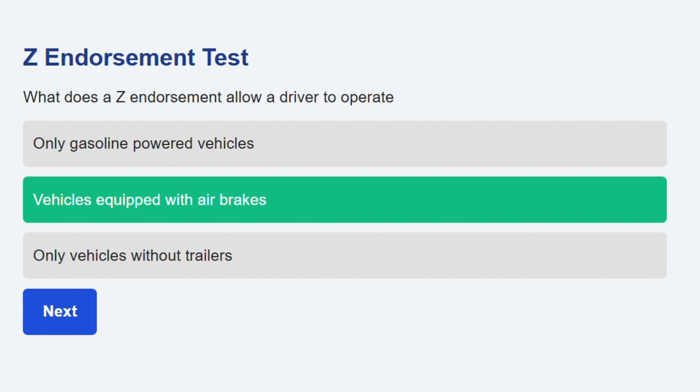Moving on, the air compressor governor should cut out at approximately 120 to 135 psi. This is the standard range where the governor stops the compressor from building more pressure, preventing overpressurization of the system while maintaining adequate reserves for safe operation.

Next question. The air compressor governor should cut in at approximately 100 psi. At this pressure point, the governor signals the compressor to start building air again, ensuring the system maintains sufficient pressure for proper brake operation.

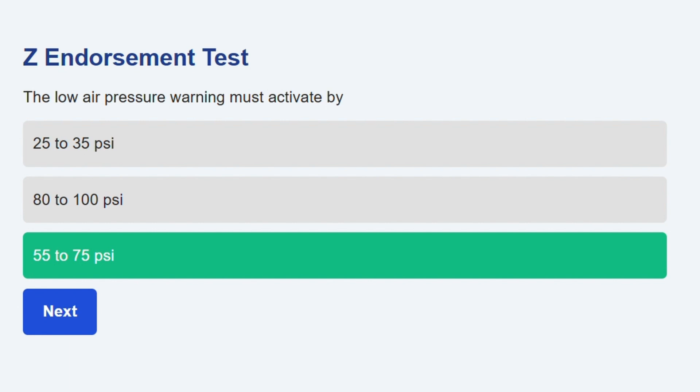The low air pressure warning must activate by 55 to 75 psi. This warning gives drivers critical notice that air pressure is dangerously low, allowing time to safely stop before the spring brakes automatically apply.

Spring brakes will begin to apply automatically when system pressure falls to about 20 to 45 psi. This automatic application serves as a final safety measure, bringing the vehicle to a stop when air pressure becomes too low for safe operation. Next up, the safety relief valve is typically set to open at approximately 150 psi.

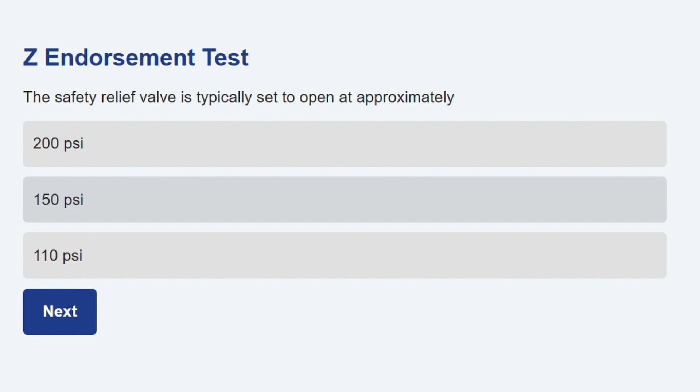This valve protects the air brake system from damage by releasing excess pressure if the governor fails to cut out the compressor at the proper pressure.

Let's see what's next. The primary function of an air dryer in an air brake system is to remove moisture and oil from compressed air. This is crucial because moisture can freeze in cold weather and block air lines, while oil can damage rubber components in the brake system.

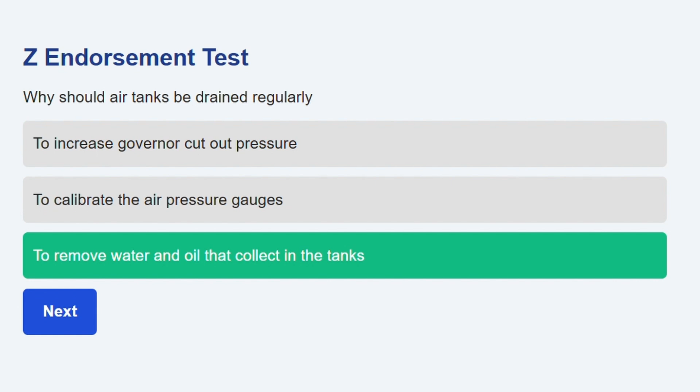Why should air tanks be drained regularly? To remove water and oil that collect in the tanks. Regular draining prevents these contaminants from building up and potentially causing brake failure or freezing in the air lines during cold weather. Dual air brake systems are designed to provide separate primary and secondary circuits for redundancy.

This design ensures that if one circuit fails, the other can still provide enough braking power to safely stop the vehicle. Moving on, compared to hydraulic brakes, the normal brake lag for air brakes is about 0.4 seconds.

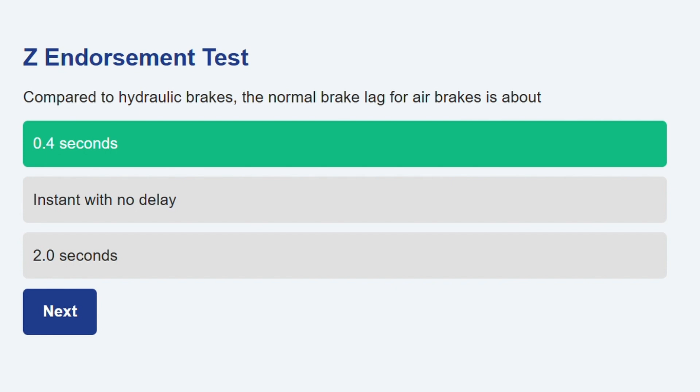This delay occurs because compressed air takes time to travel through the lines and activate the brakes, which drivers must account for when stopping.

The S-cam brake mechanism converts pushrod motion into cam rotation to spread brake shoes. This mechanical advantage system efficiently transforms the linear force from the brake chamber into the rotational force needed to press brake shoes against the drum.

With brakes released, slack adjuster free play of more than about how much indicates adjustment is needed? About 1 inch at the pushrod. Excessive free play means the brakes are out of adjustment and won't apply properly, reducing braking effectiveness and increasing stopping distances.

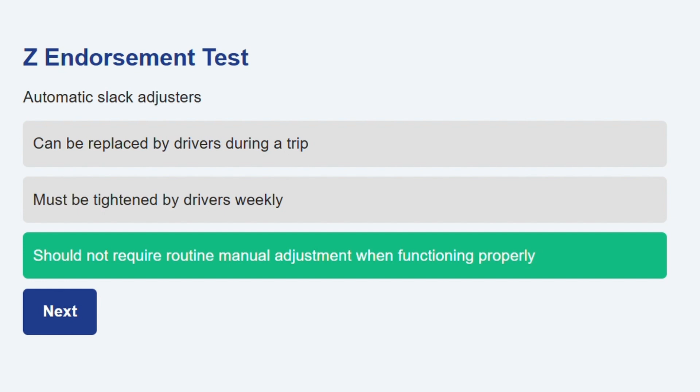Automatic slack adjusters should not require routine manual adjustment when functioning properly. These devices are designed to maintain proper brake adjustment automatically, though they still need regular inspection to ensure they're working correctly.

From 85 to 100 psi, air pressure should build within 45 seconds or less. This standard ensures the compressor is working efficiently and can quickly restore operating pressure for safe vehicle operation.

With the engine off and service brakes applied, the maximum air loss for a single vehicle is 3 psi per minute. This test checks for leaks in the service brake system, with anything exceeding this rate indicating a dangerous air leak that needs immediate repair.

With the engine off and brakes released, the maximum air loss for a single vehicle is 2 psi per minute. This static leak test helps identify problems in the air system when the brakes aren't applied, ensuring the system can maintain pressure during normal operation.

At startup, the ABS indicator light should come on briefly and then turn off after self-check. This bulb check and system test confirms the ABS is functioning properly and ready to assist with vehicle control during hard braking.

Parking brakes on air brake vehicles are held by mechanical spring force. This fail-safe design ensures the parking brakes will automatically apply if air pressure is lost, preventing runaway vehicles.

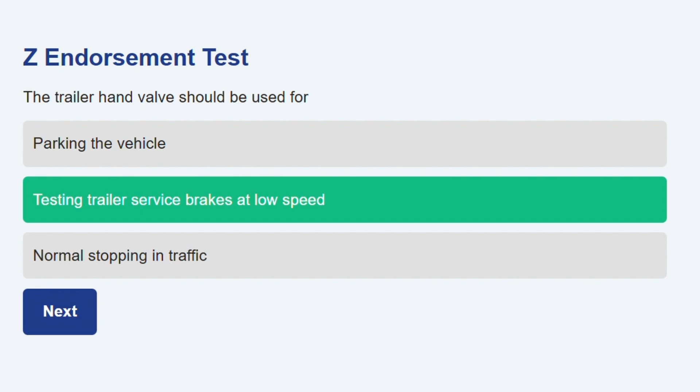The trailer hand valve should be used for testing trailer service brakes at low speed. Using it for normal stopping is dangerous because it only applies trailer brakes, which can cause jackknifing or loss of control.

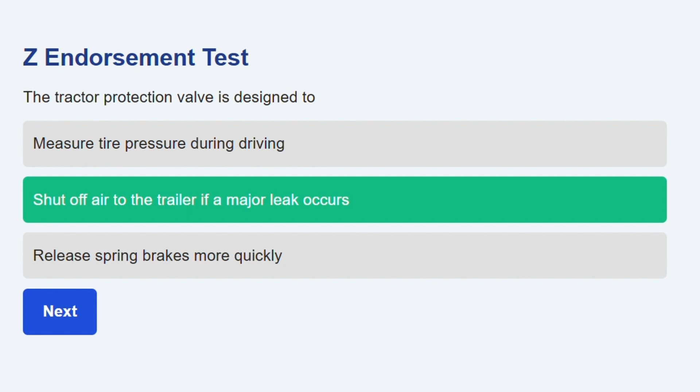The tractor protection valve is designed to shut off air to the trailer if a major leak occurs. This valve preserves air in the tractor's system, ensuring the driver maintains enough pressure to stop safely even if the trailer air system fails.

On most tractors, the emergency supply line is red and supplies trailer air. This color coding helps ensure proper connection, as the red line controls both the trailer's air supply and emergency brake release.

Glad hand seals should be replaced if cracked or leaking. Damaged seals allow air to escape, reducing system efficiency and potentially causing brake failure if the leak becomes severe.

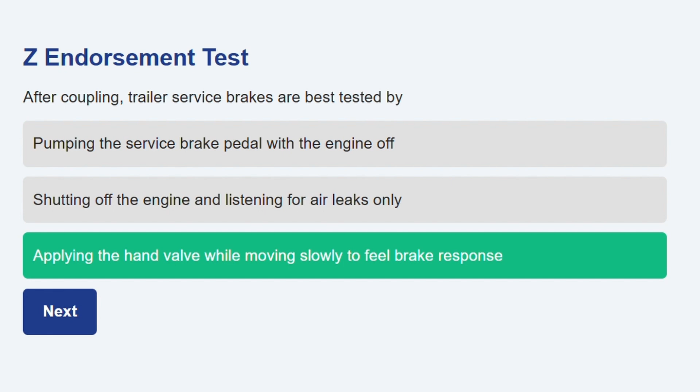After coupling, trailer service brakes are best tested by applying the hand valve while moving slowly to feel brake response. This low-speed test confirms the trailer brakes are connected and functioning before entering traffic. Here's another one.

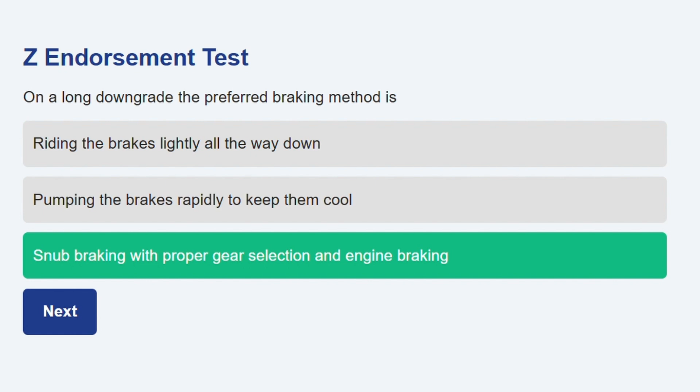On a long downgrade, the preferred braking method is snub braking with proper gear selection and engine braking. This technique involves firm brake applications to reduce speed, then releasing to let brakes cool, preventing brake fade from overheating. Brake fade can be reduced by controlling speed with a lower gear and engine brake. Using the engine to help control speed reduces the work required from the service brakes, keeping them cooler and more effective.

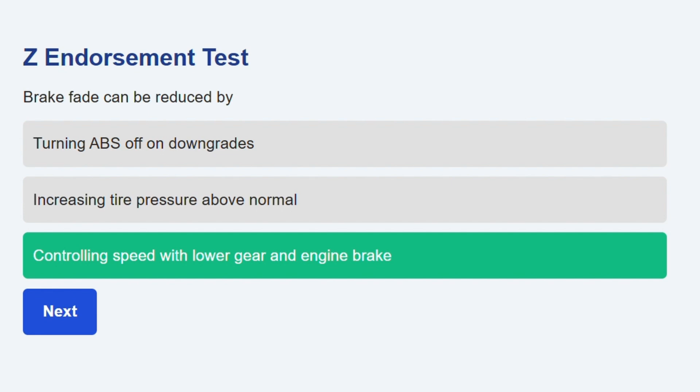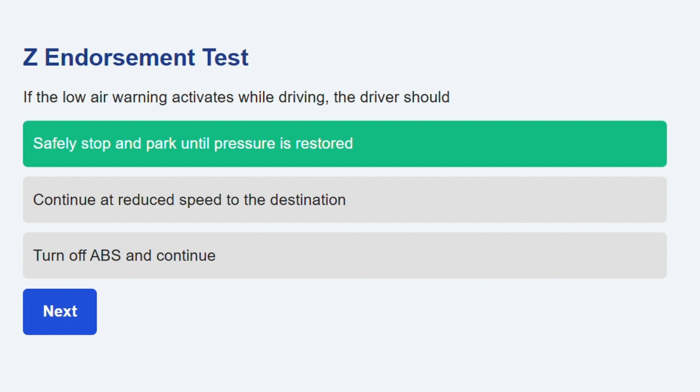If the low air warning activates while driving, the driver should safely stop and park until pressure is restored. Continuing to drive with low air pressure is extremely dangerous as the spring brakes could apply suddenly, causing loss of control.

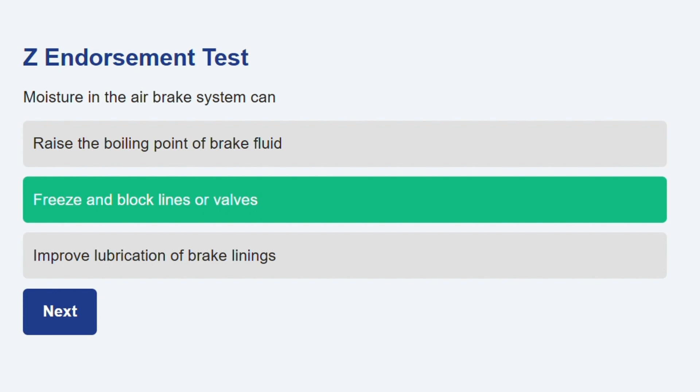Moisture in the air brake system can freeze and block lines or valves. Ice blockages prevent air from reaching the brakes, potentially causing complete brake failure in cold weather conditions.

When inspecting brake drums, you should look for cracks, grooves, or bluing from heat. These signs indicate potential brake failure risks, with cracks possibly leading to drum breakage and heat damage reducing braking effectiveness.

Disc brakes operate by calipers clamping a rotor to create friction. This design provides more consistent braking than drum brakes and better heat dissipation, though they're less common on heavy commercial vehicles.

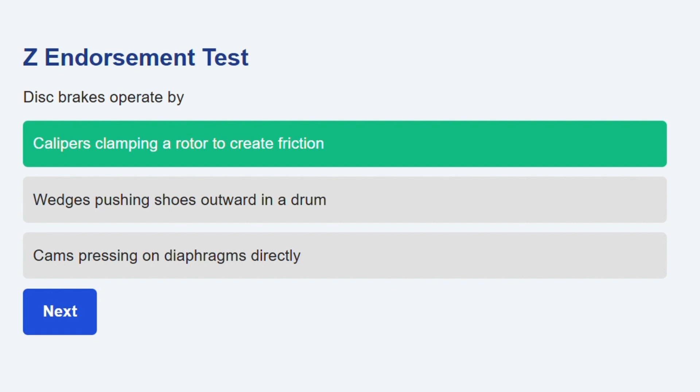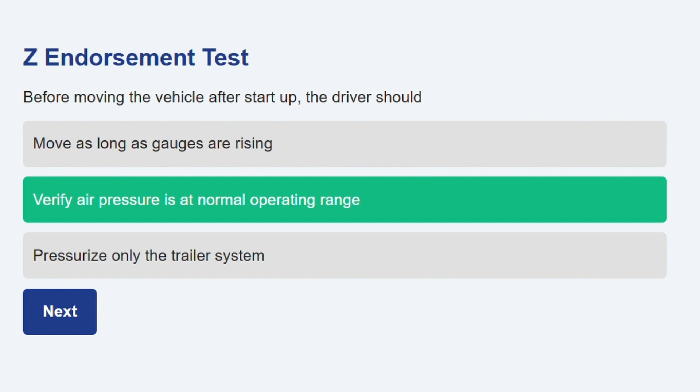Before moving the vehicle after startup, the driver should verify air pressure is at normal operating range. Starting to drive without sufficient air pressure means the brakes may not function properly, creating an immediate safety hazard.

If one circuit in a dual air system loses pressure, the driver should stop and have the system repaired before driving. Even though one circuit remains, continuing to drive is unsafe and illegal, as the vehicle no longer has the required redundancy for safe operation.

Pushrod stroke must be within manufacturer limits when brakes are applied. Excessive stroke means brakes are out of adjustment, reducing braking force and increasing stopping distance dangerously.

Adjustments to air brakes should be made only by trained and authorized personnel. Improper adjustment can cause brake failure or uneven braking, making this a task that requires proper training and certification.

When parking on a grade with an air brake vehicle, set the parking brakes and use wheel chocks as needed. This combination provides redundant protection against vehicle movement, especially important with heavy commercial vehicles.

To check basic compressor operation, you should observe that pressure builds to cutout range. This confirms the compressor can build adequate pressure and the governor properly controls the cutout function.

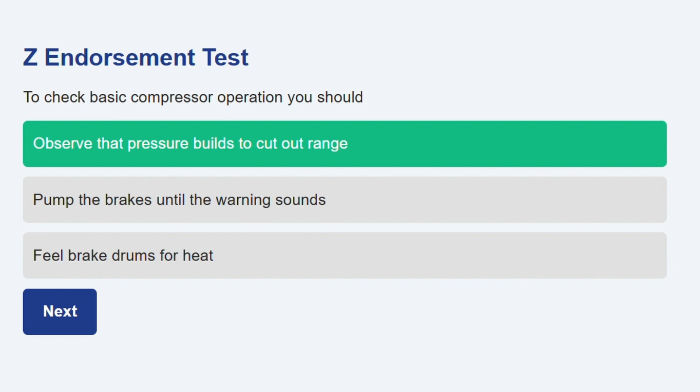The component that controls compressor loading and unloading is the governor. This device monitors system pressure and automatically controls when the compressor pumps air or runs unloaded to maintain proper system pressure.

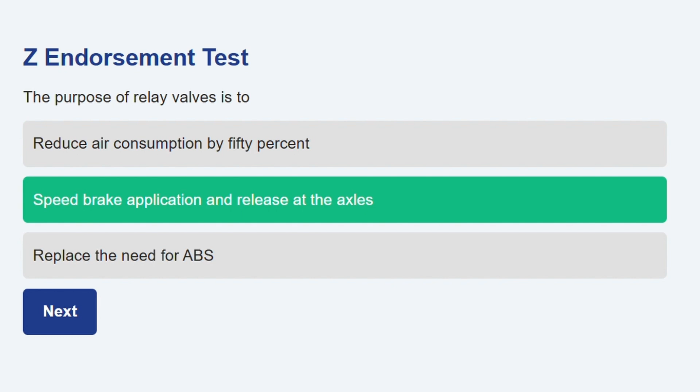The purpose of relay valves is to speed brake application and release at the axles. By positioning these valves closer to the brake chambers, they reduce the distance air must travel, improving brake response time.

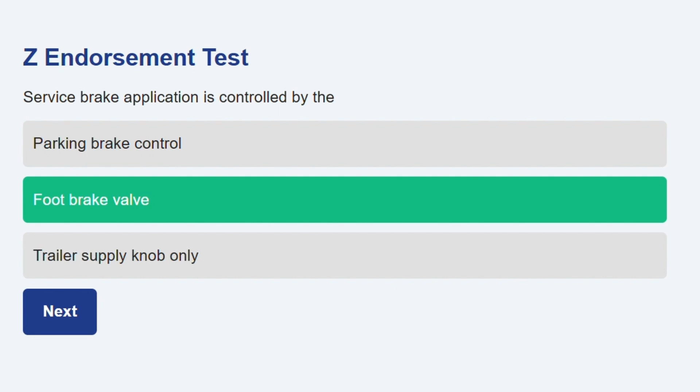Service brake application is controlled by the foot brake valve. This valve meters air pressure to all service brakes proportionally to pedal pressure, allowing smooth and controlled stopping.

A proper tug test after coupling involves gently pulling against applied trailer brakes. This test confirms the fifth wheel is properly locked and the trailer won't separate when moving forward.

Trailer emergency brakes will apply automatically if supply line pressure is lost or drops too low. This fail-safe feature ensures the trailer will stop if it becomes disconnected or loses air supply from the tractor.

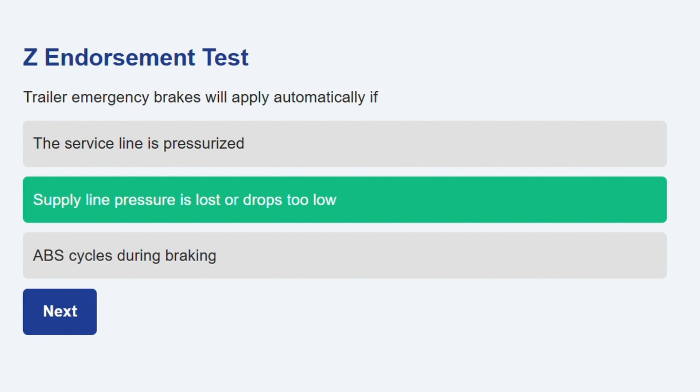Shutting the engine off on a downgrade is unsafe because engine braking and power steering are lost. Without the engine running, you lose these critical control systems while the air pressure gradually depletes, creating multiple safety hazards.

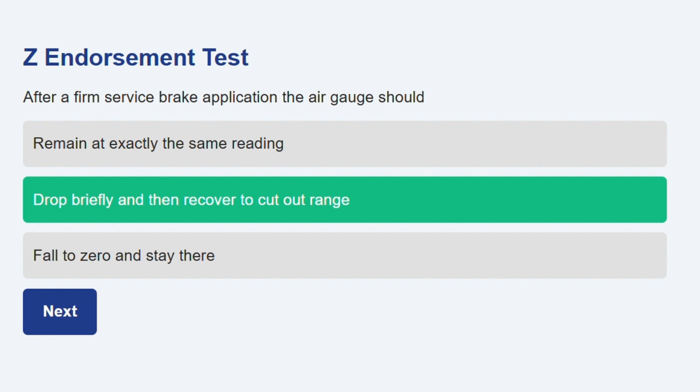After a firm service brake application, the air gauge should drop briefly and then recover to cutout range. This pattern shows the system is using air for braking, but the compressor is maintaining adequate pressure for continued safe operation.

If the ABS warning light stays on after startup, you should brake normally and schedule service soon. While ABS malfunction doesn't affect normal braking, it means you won't have anti-lock assistance during emergency stops.

The trolley valve is intended primarily for testing trailer brakes. Also called the hand valve or Johnson bar, this control allows independent trailer brake application for testing and limited parking situations.

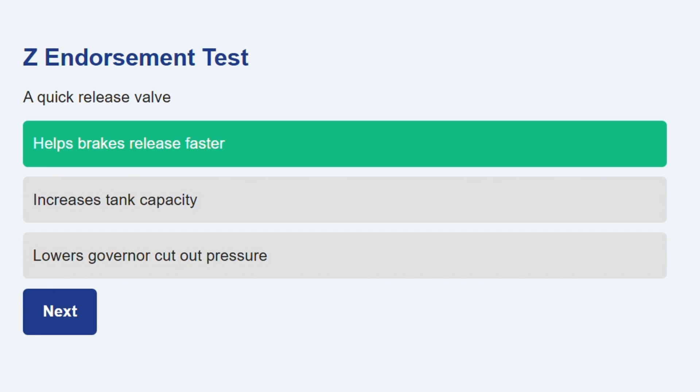A quick release valve helps brakes release faster. By exhausting air directly at the brake chambers rather than back through the entire system, these valves reduce brake release time and improve vehicle control.

In freezing conditions, an alcohol evaporator or air dryer helps by preventing ice in lines and valves. These devices either remove moisture before it enters the system or add alcohol to lower the freezing point of any remaining water.

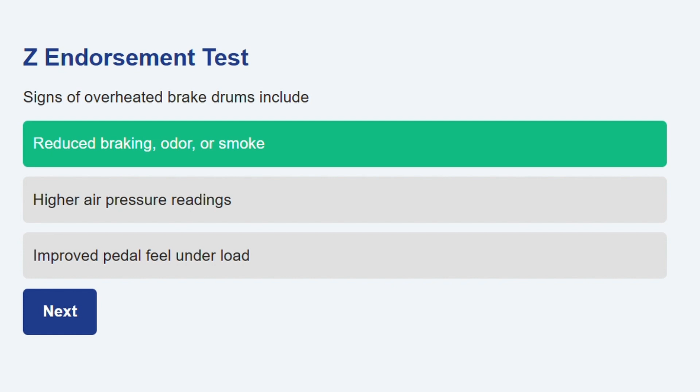Signs of overheated brake drums include reduced braking, odor, or smoke. These warning signs indicate dangerous brake fade, requiring immediate action to cool the brakes before they fail completely.

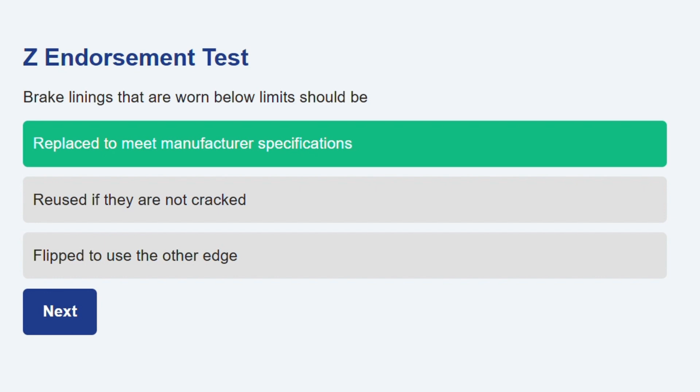Brake linings that are worn below limits should be replaced to meet manufacturer specifications. Worn linings reduce braking power and can damage drums or rotors, making timely replacement essential for safety.

A proper parking brake test during pre-trip is to set the parking brake and gently pull to verify it holds. This test confirms the parking brake can hold the vehicle's weight, preventing dangerous runaway situations.

When coupling a trailer, push in the trailer air supply control only after the lines are connected and coupling is tested. This sequence ensures all connections are secure before pressurizing the trailer system, preventing dangerous air leaks or sudden brake releases.